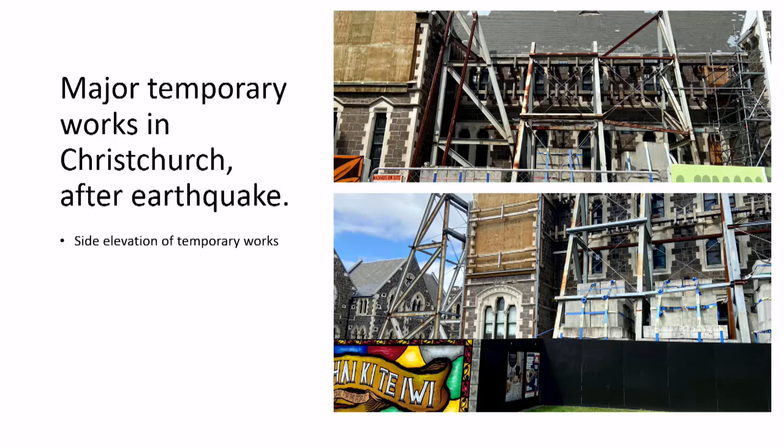That was them. We're in Christchurch now, actually, and that was the rebuild of the new library in Christchurch, which is quite good. The downside was it was actually an Anglican church in Christchurch. This was the 2011 earthquake, and this is the order of structural steelwork that was necessary to stabilise this building.

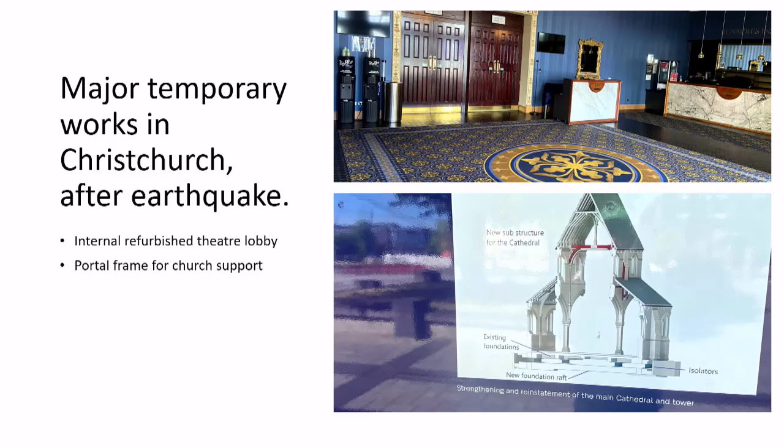But they got this thought process about the... They're actually stabilising a portal like that to support the rest of the building. But the money it was costing was so much that the government were saying, sorry, you're going to have to make this building more accessible to other people, not just your particular church religion, as it were. So there's a bit of a fight going on there.

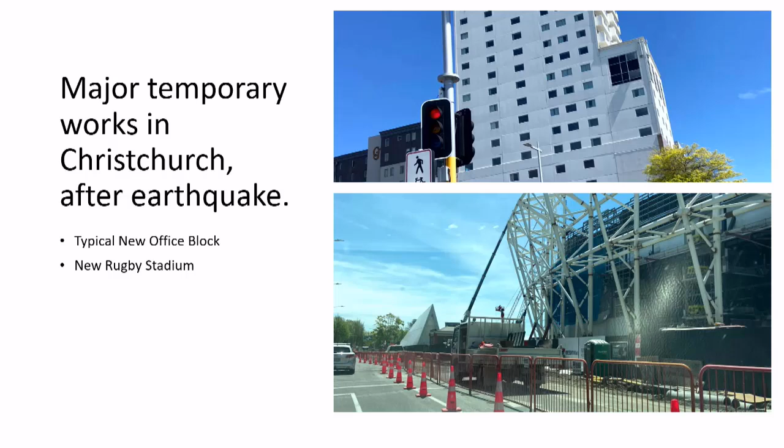I was determined to get a rugby pitch going here. This was the new stadium in Christchurch that's being built there. And that seemed to be a lovely bowl of an arena that's going up there.

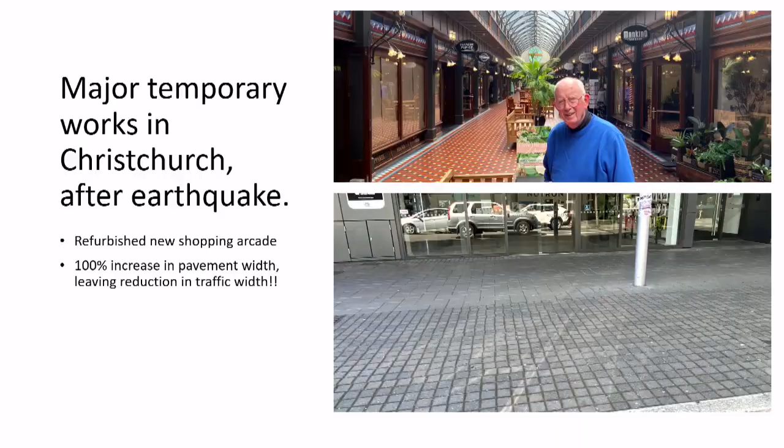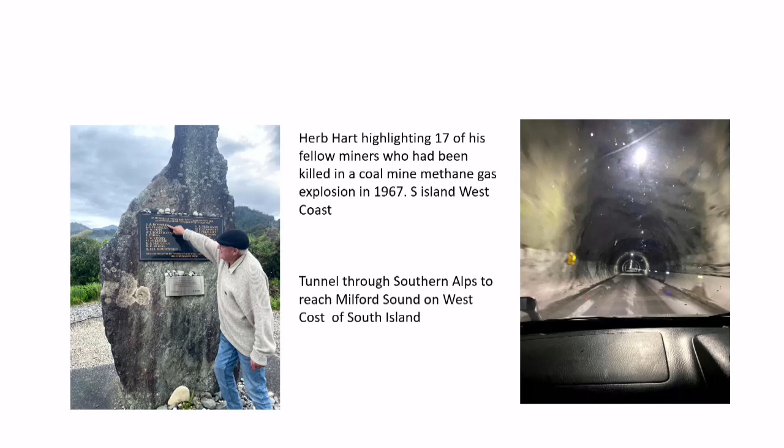Herb is pointing out here a chart that was showing, sadly, those that got killed in this mine disaster in 1967, and he had to identify, unfortunately, the bodies, and it was really quite sad. But nobody greater than Herb to see and realise the way that can get helped out.

I'm not of the right age to be climbing up glaciers from sea level, so I thought I'd get the chopper up. Got the chopper up, with three other guys in there, and I said to the lady pilot, this cloud seems to be building up quite a bit here. Shouldn't we perhaps be thinking about getting back down to sea level again? And she very quickly realised that was a serious thing, so we whistled into the cab and got down, and she was able to take the chopper down in the valley and not risk getting stuck up there for the evening, as it were.

Okay, we'll move on to our main presentation this evening, and it's about tunnelling through the Alps. So we have 3 speakers. Emmanuel Humbert, who's the Director of Construction, France Direction with TELT. Emmanuel holds a master's degree in civil engineering from the French National School for State Civil Works. He worked in the tunnelling industry for more than 2 decades.

After working for nearly 15 years in the Centre for Tunnel Studies, the French government's technical centre for road tunnels, he joined TELT, owner of the Lyon Turin tunnel, as head of the construction department, where he coordinates work on French construction sites. His experience includes road and rail tunnel construction and has been accumulated over the course of many tunnelling projects as a project engineer or project manager.

He has developed extensive professional skills in tunnel design, geotechnical engineering, and project risk and contract management. He's also a lecturer for postgraduate courses at French universities on the subject of tunnelling and tunnel boring machines. Emmanuel is involved in the ITA and is active in the French Tunnelling Association.

Second speaker is Adrian Fontana. He's head of construction management with the Pini Group. Adrian has been significantly involved in the construction of the longest tunnels in the world for the past 20 years: the Lötschberg Base Tunnel, the Gotthard Base Tunnel, the Ceneri Base Tunnel, and the Brenner Base Tunnel. His experience covers all phases of design, and he held all relevant functions up to the project manager at the Ceneri Base Tunnel and the Euralpin Lyon Turin Tunnel as a consultant to the client.

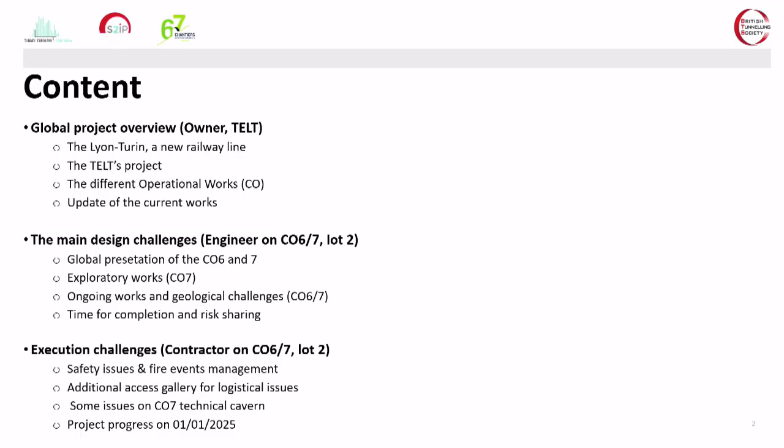Thank you very much. Thank you for giving us the opportunity to present this challenging project. I think it's one of the most challenging projects in France for sure, in Europe also, and perhaps also in the world. As it was said, this presentation is split into 3 parts. One overview of the project, I will present it. I'm the owner of the project. One focus on the designer's point of view with Adrien, and also the company point of view with Benjamin Leconte from the company. First of all, the project overview.

This project is led by TELT. Maybe you don't know who TELT is. TELT stands for Tunnel Euralpin Lyon Turin, the public promoter of the project. I work for TELT, for which I am the construction manager, and I personally am in charge of organizing and following all the works on the French side.

TELT was created in 2015 by the French and Italian states and is responsible for the design, construction, and operation of the cross-border section of the future Lyon Turin link. So what is the Lyon Turin link? You'll see a little bit later.

This society follows a previous company, LTF, that was in charge of the studies, investigation, and preliminary works. And also, a little bit earlier in 1994, Alpetunnel, which was in charge of the very beginning of the studies.

Above all, the Lyon Turin link is not just a project between Lyon and Turin. It's only a part of a wider project across all of Europe. The idea is to create an efficient global network through Europe, and the Lyon Turin link is one of the parts of this project.

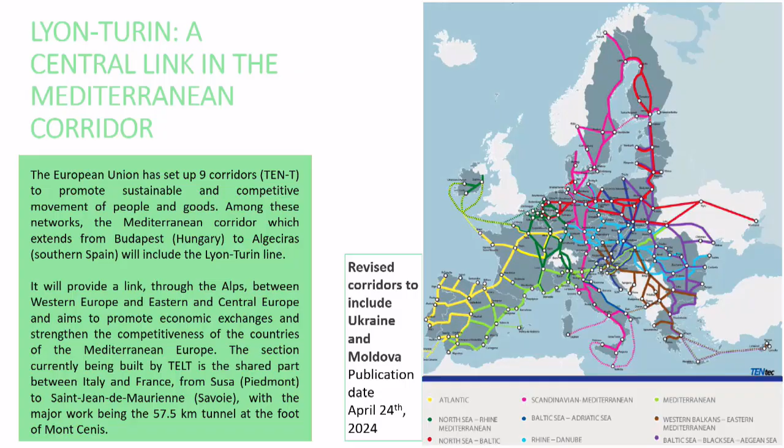This project is composed of nine corridors, and Lyon Turin is in the center of the Mediterranean corridor. So why is Lyon Turin such a challenging project? Because it has to cross the Alps.

The global line between Lyon and Turin is 270 kilometers long and is split into three parts: one French part, conducted by the French railway company; one Italian part, led by the Italian railway company; and the cross-border international section, where TELT, my company, is in charge of organizing the construction.

The principal challenge of this project is to pass through the Alps. A historic line already exists, but is fully inadequate because of its characteristics and geometry. The idea of this project, like other similar projects in Europe, is to pass through the Alps at their base, creating an efficient infrastructure that boosts the communication of freight, passengers, and people all through Europe.

Other similar projects exist: there are 7 long and deep tunnels under the Alps. The design of the Mont-Cenis base tunnel is based on the experience of the others, some under construction and some already built. The 7 tunnels are the Mont-Cenis base tunnel for the Lyon Turin project, the Gotthard base tunnel, the Ceneri base tunnel, the Lötschberg tunnel, for which Adrien also worked previously, the Brenner base tunnel, the Semmering base tunnel, and the Koralm.

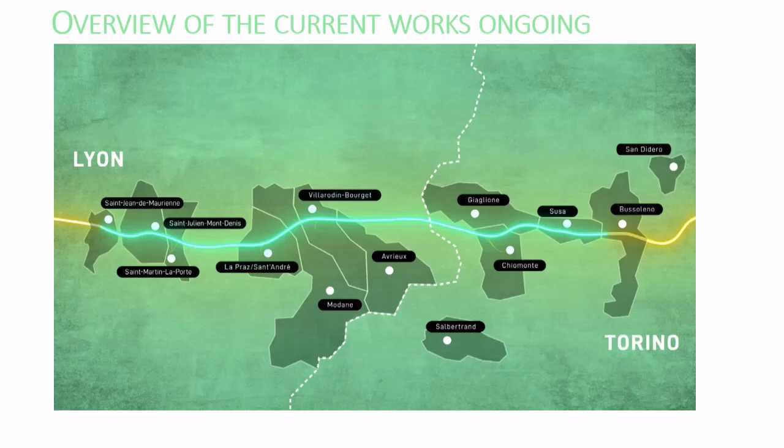So let's have a quick overview of the works. This video is not quite up to date, but has been made 6 months ago.

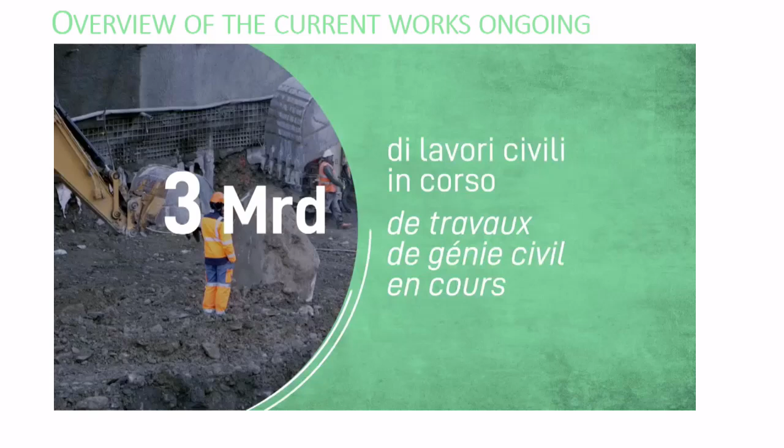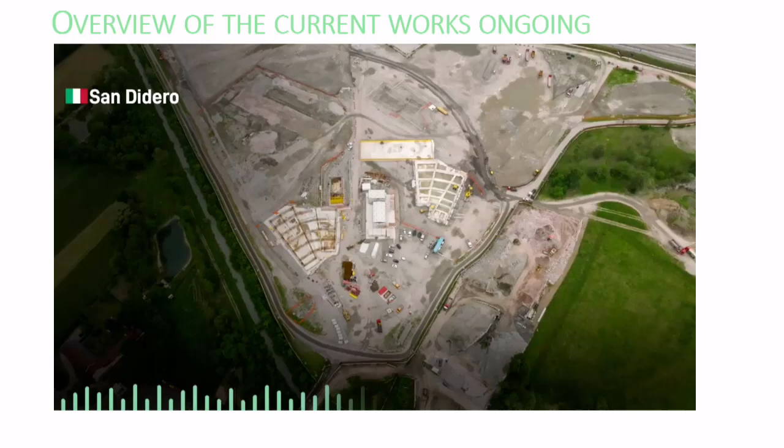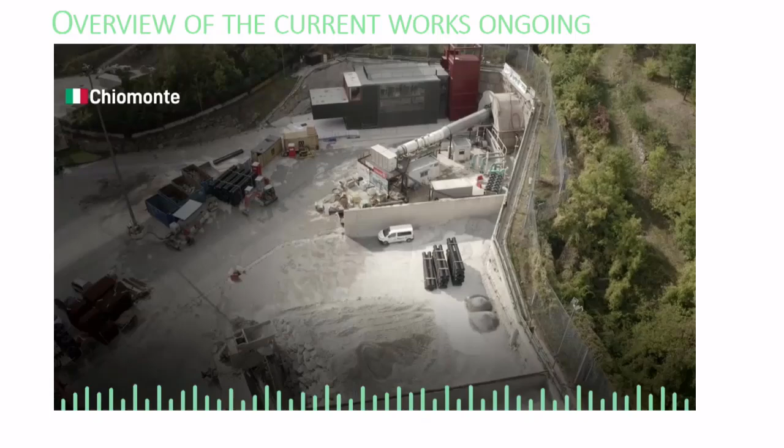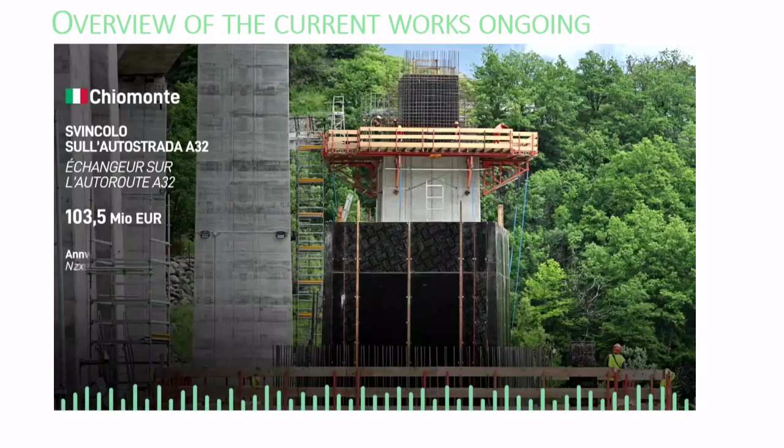Here in Italia, the entrance of the work in Italia, Piemonte, and all the preliminary works to make connection with the motorway, actually ongoing. The preparation of the sites for materials, Italia also.

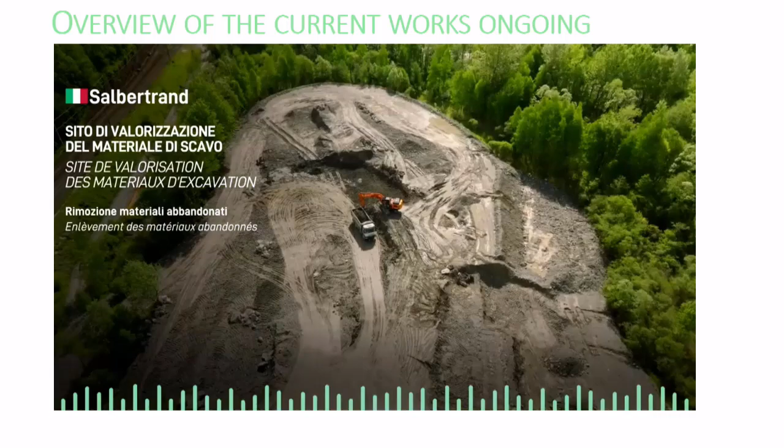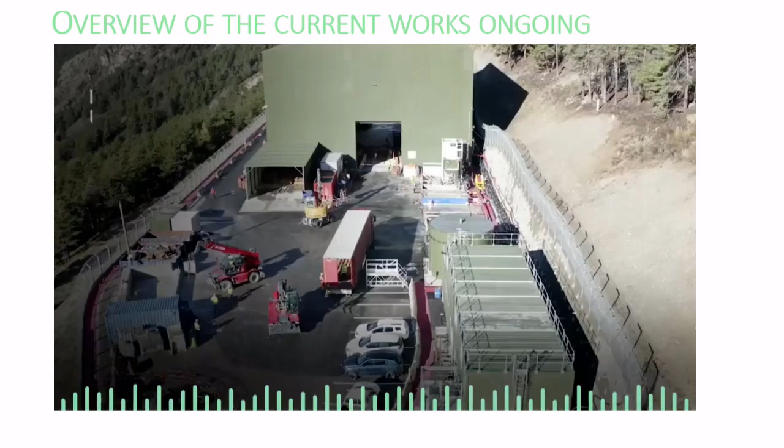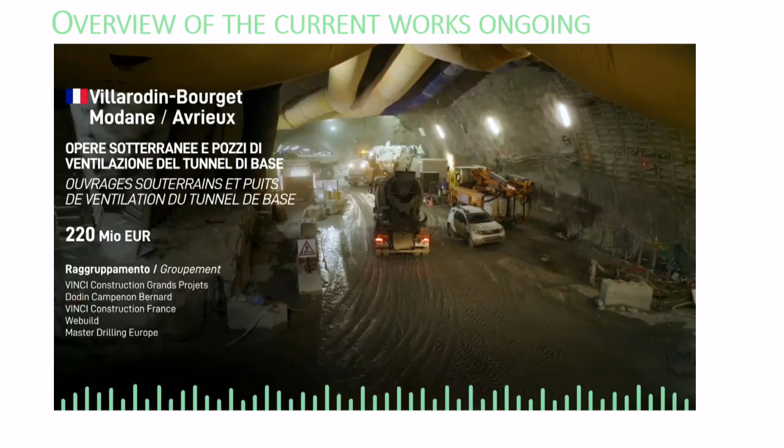Here in Modane, a road to avoid the trucks passing through the city, and also the preparatory works of the 4 shafts to bring ventilation for the next part of the project: Saint-Martin-la-Porte and La Praz, which will be presented a little bit later.

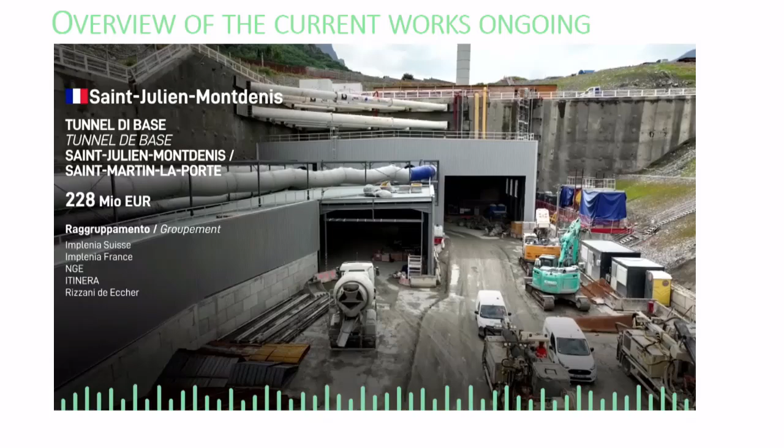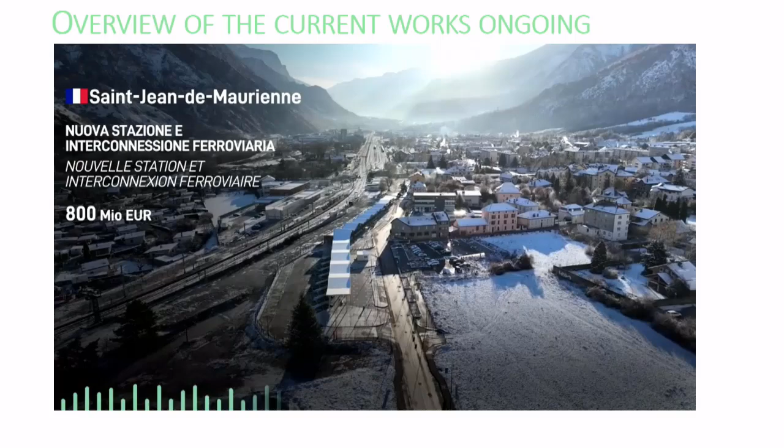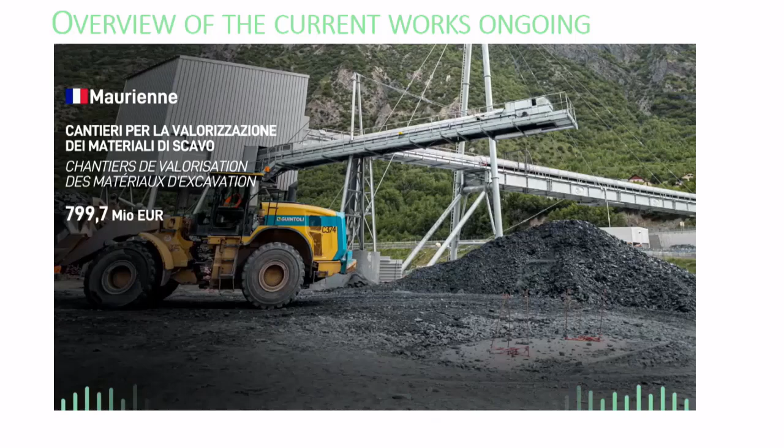Saint-Julien-Montdenis, the entrance of the tunnel in France. Saint-Jean-de-Maurienne, where lots of works are ongoing to connect with the existing railway network. And also one specificity of the project, the management of excavated material, which is specific to lots of construction.

Finally, to introduce the next presentation, I will talk a little bit about the contract. What is the spirit of our contract? The spirit is to divide, to have a sort of risk-sharing policy in our contracts.

The principle that will be developed in the next part of the presentation is that on the one hand, we have the logistical and construction method risk that is assumed by the company through the contracts. On the other hand, the owner keeps the risks defined for the geology through the risk register.

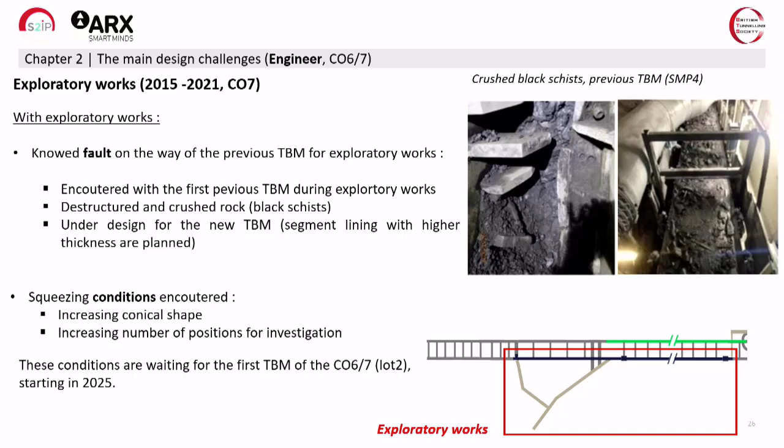The technique is getting further - the TBMs that we have today are not the same as 20 years ago. The technical issue helps us, and time helps us do some challenging projects and do it faster, and it's possible. Here you see another picture, this is the existing tunnel - there was a single shield that worked for 8 kilometers, and they encountered 2 faults with squeezing conditions. This actually was the basis and input for the design of the main tunnel.

The exploratory works - just to show you some pictures, for that squeezing we went up to 1 meter of squeezing. This is a condition that's really difficult - finding the support to manage these conditions is really difficult.

They tried different systems, and at the end the solution was found with flexible support using TH arcs, which were used in other big projects too. Here you see the pilot tunnel used to handle this first squeezing, and then you can stabilize and do the real galleries. This was the exploration, these pictures from the exploratory work.

Now we have 3 machines, 3 TBMs. This one is actually in the tunnel today. Diameter classic, 10.42 meters - it's a big feature, really nice, something special. We have a conicity so that we can manage squeezing rocks. We hope it works, we want to see that in 1 year.

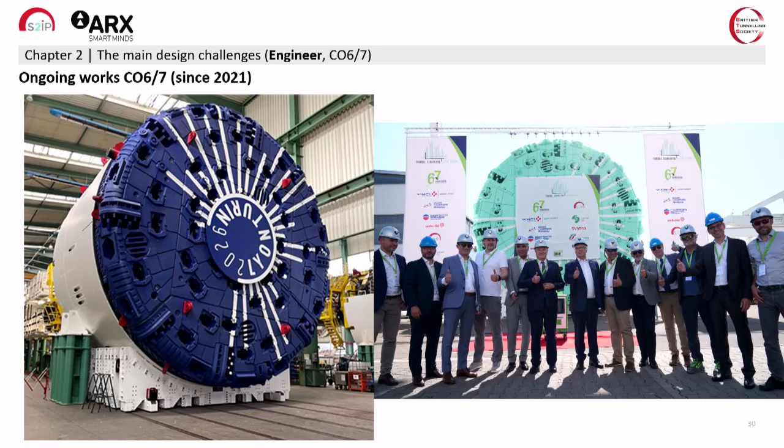Now, what else - that's actually the interesting part for me now: drill and blast. You have a lot of drill and blast.

For me, it's always special because you never know what you're going to have, and the safety part is a big issue too when you have drill and blast. This is one example on the right side. You see a big technical cavern that has sections of 380 square meters.

It's really big. And when you have the bad luck that the geology is not so good, because here we had some problems. You see, this is a ramp that we had to make to reinforce the 160 meter long cavern. We had to reinforce about 50 meters with 12 meter long steel anchors. Maybe Emmanuel is going to talk a little bit in detail about that. But okay, we know that we have some problems.

We have 2 kilometers of squeezing. Its name is Ouillet. It's an important squeezing condition that we expected. As I said before, up to 1 meter of squeezing, and it's going to be pretty challenging. We're going to start in there in a few weeks. We will see. Maybe next year I can talk more about that.

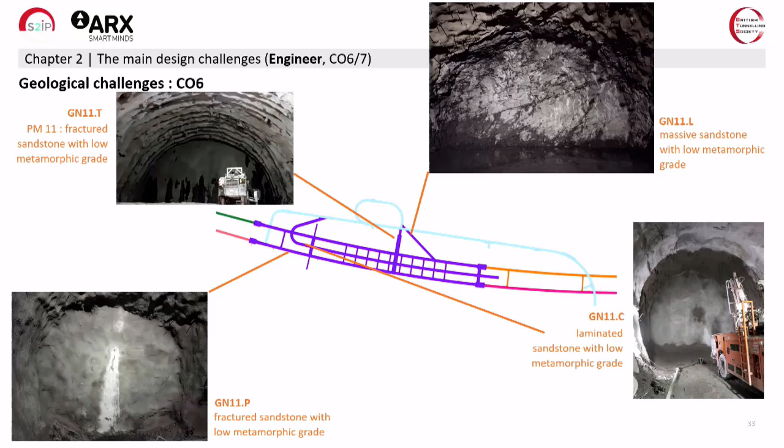And here the thing that we really have to watch out for is the influence from one excavation to the other. When you're in there, you have excavated the central one, and you're going on the left side, and then it's going to start moving on the other one. And this is always tricky. This is the other one, some pictures.

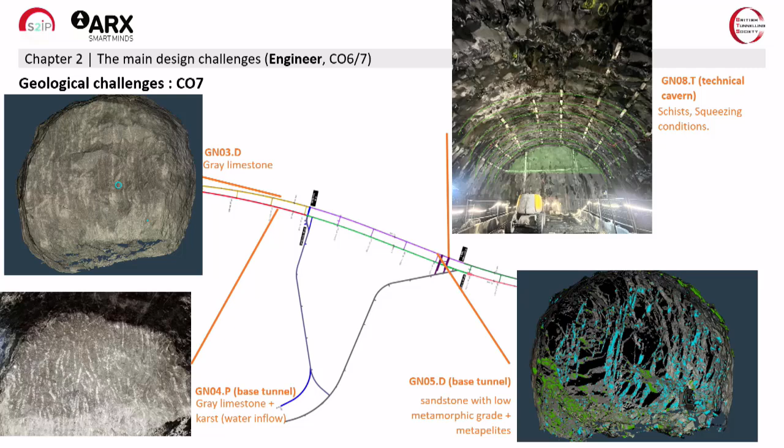Here we see this technical cavern where we have to reinforce. This is ongoing. You see we have some scans. The geology is managed with 3D scans to have better information, and we try to use AI too, so that we can be more precise for certain interpretations. Let's say it like that.

Okay, this nice picture. This is direction France. This is the limestone with karst. And you see, when you have a preliminary exploration, we have a core drill or a destructive drill. But when the drill is over here, this one you don't see. This is a karst. This is not an excavation.

This was the face. This was a 3-meter drill and blast advancement, and there was a karst filled with clay. Here it's no problem, but when you have this on this side and it's filled with water, it can be a problem.

Okay, this is the whole zone that we have now going in the French direction. It's really interesting for the geologist, but it's pretty tricky, and we have some water too. Here the karst was empty, just clay, but we have some zones where we have water, where we're going to drain the water. Okay, now quickly to what Emmanuel said before.

This is actually really important. It works. It's based on this norm in Northern Europe actually. It's this risk sharing. It's really to try. We are constructing a prototype, so we need an instrument for how we can work and how we can pay the contractor, how we can be sure that it's not going into big claims and big problems at the end.

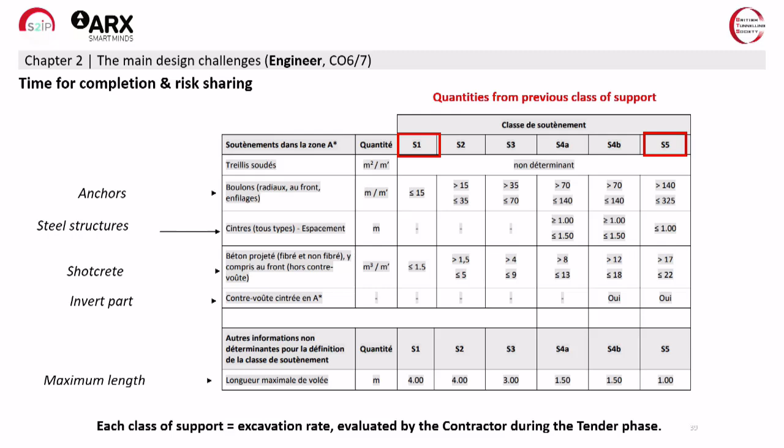And when you're in the range, when you have your shotcrete and you made more, like instead of 10 you have 20 centimeters of concrete, you're going to the next class. And it's paid. You know every day what your contract costs.

Okay, and when this doesn't work, because the prototype, I repeat, is always a prototype, when these classes didn't work, when the designer didn't see everything and didn't think about everything, we have another instrument. That means that we can enter these exceptional conditions. It means that our whole toolbox is empty. We have to invent or calculate or find something else to get through.

Then we have this instrument so we can go to this exceptional condition. It means we are mobilizing engineers, experts, and the contractor to find how we can go through. And in this time, day by day, the costs are paid. Because when you have a team of 10 people waiting 8 hours, you have to pay.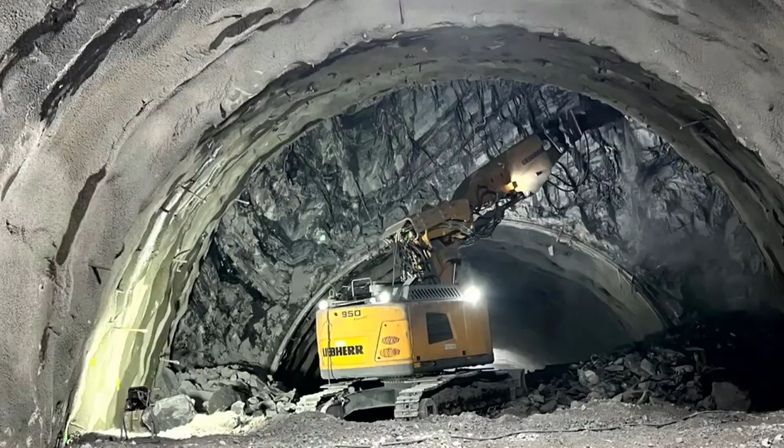Cross-section, always a problem, because it's really difficult to calculate, really difficult to know what is coming and how the stress is going into the mountain. Here you see one face on the right, one on the left. You have to work on both sides, because you can't work just one side, or you're going to have a lot of stress problems in this cross-section, especially when you have these wide sections.

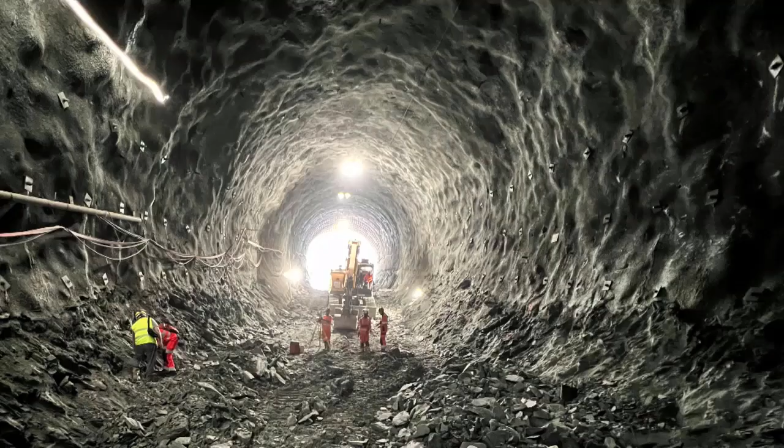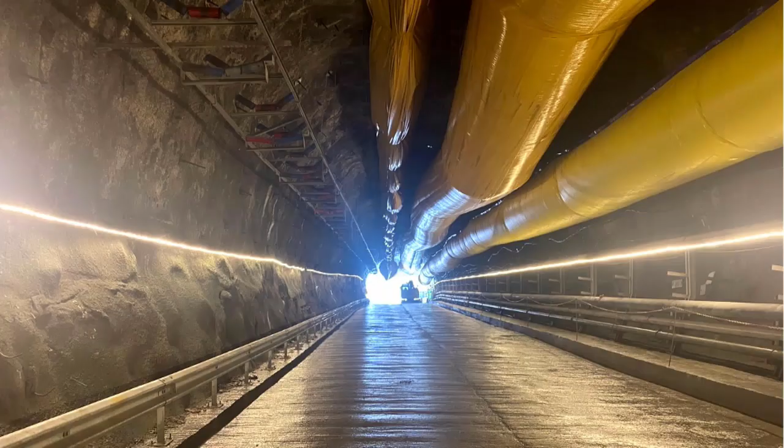When we started the project, one of our tasks was that we had to expand one adit because it was actually too small. Here you see we had to work with drill and blast. We went down with the invert for 1 meter 60, and you see the result. You see this one at the end was like that. It's actually pretty nice, no?

And now it's clean, and we have a ventilation issue, because it's always difficult to put all the air in this system. We had some problems, but we're going to resolve it at least. And here are some pictures, just to show that we are really on the construction site. No, it's not just for the show.

Thanks, Adrian. I will not reintroduce our joint venture, so I will directly move to some safety issues. I will discuss first fire events, because I understand that in the UK you don't have the same approach regarding fire events. So in the past, TELT signed an agreement between the fire brigade of the valley and the project.

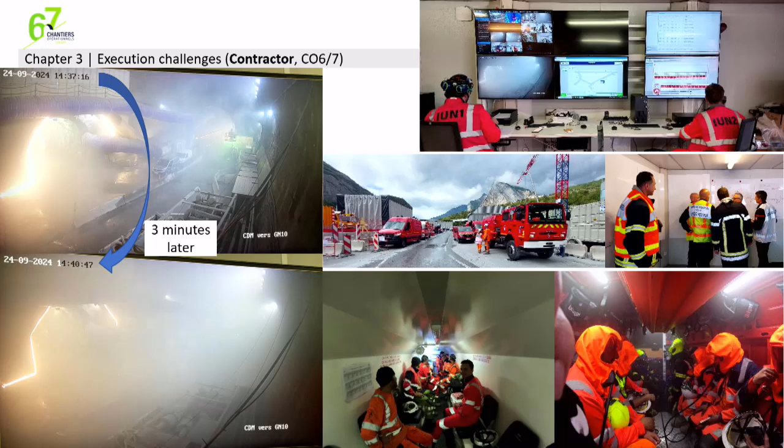Just some pictures of this event. We brought this cold smoke into a cross passage. You can see that 3 minutes later we could see nothing. And on this side you can see all the firemen working to test the ventilation strategy, and all the guys who were in the rescue chamber.

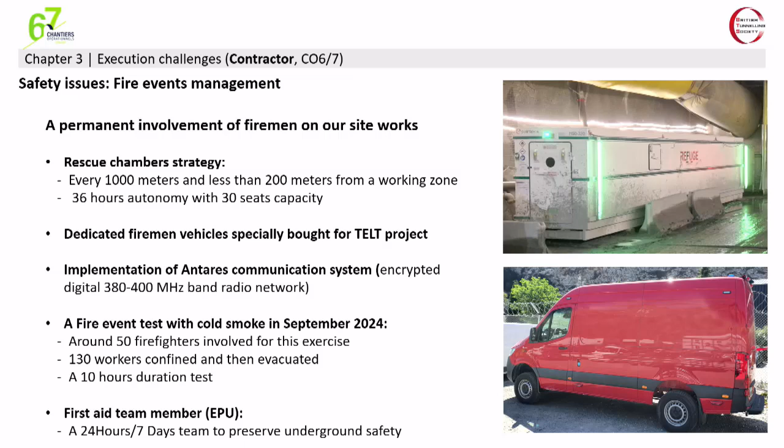And this was a very fruitful exercise, I would say. Maybe just in addition to that, one specification on our project: we implemented a first aid team. It's a team dedicated to safety. They ensure that, for example, rescue chambers are fully operational, there is air, food, and so on. All the devices and communication systems are working properly, and they are working 24 hours a day, 7 days a week, just to ensure everything is okay.

Without any transition, I will just jump to other stuff now, more dedicated to logistics. So we are on CO7, on the west part of the project, and when we arrived, there was an existing adit, the west adit, and from this unique adit on 500 meters, we had basically half of the project to excavate and to manage. This adit on these 500 meters is basically an 80 square meter adit, and within this adit we need to ensure all the muck out of the project, because for different reasons we do not muck from the other site. So all the muck is going through this adit.

That means we need 3 conveyor belts. So basically we have around 4 million cubic meters to remove. Because here we have a TBM, we need to bring all the segments, which go through this adit. We also need to supply basically around 800,000 cubic meters of concrete for the whole site. We need also fresh air because we are in tunneling. We have also exhaust air because of drill and blast works.

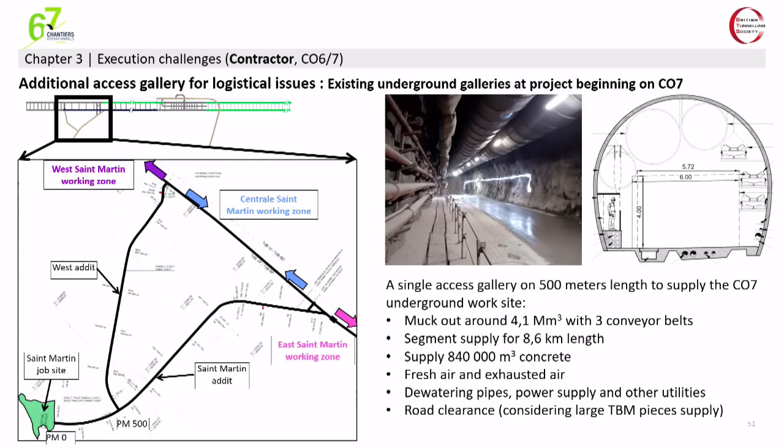It was a real challenge, and when we went into the detailed design, basically we said, okay, look, we need a little bit more fresh air, we need more exhaust air, we need more space for the conveyor, we need more space for the circulation area, we need utilities and so on, and it was a real nightmare because it was not feasible to bring everything inside these first 500 meters.

In addition to that, this is a typical section, so it might seem quite okay, but at the end of the day, you need to keep in mind that at some intersections it's a little bit more challenging. So at this intersection, at PM so-called 500, we need to perform additional huge excavation just to ensure that the conveyor belt is crossing and so on. Huge challenge. And at the end, we said, look, we need another solution because we will never succeed to work properly with such a solution.

So the solution was, okay, this is the first 500 meters. Let's do an additional adit of basically around 500 meters. And the idea is with this adit, we will supply all the west part of the project, while with the east adit, we will supply the east part of the project. So we made the design, we arrived with a 70 square meter section. We solved some ventilation issues, some clearance for the vehicles.

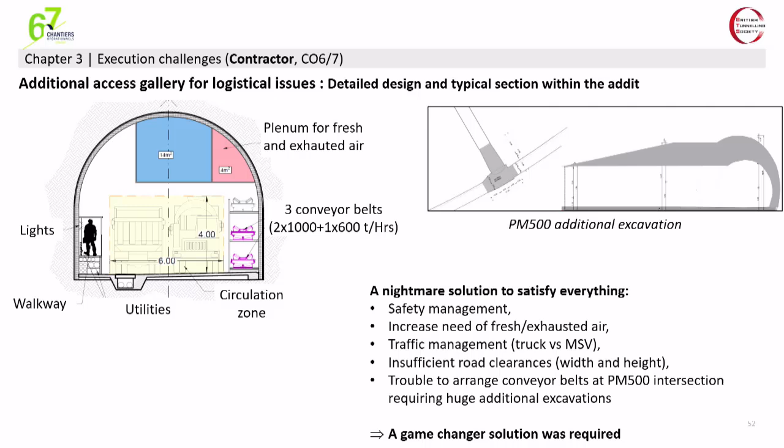We also changed the strategy for the ventilation. In fact, now we can make a circle for the ventilation. That means we bring fresh air here, within the tunnel section we go here, and then we go back. The fresh air is doing a loop, and then we can pick fresh air, for example, for this tunnel and everywhere. And that's definitely a game changer, because for us, at the beginning, within this part, with this 14 square meters, we needed basically 25 meters per second of air, and it was a nightmare. It was a huge power consumption. So with such a strategy, it was feasible.

So we made the feasibility in spring 22. Then we made some ground investigation, especially close to the portal during the summer, detailed design during the autumn and then to the spring. We also needed client approval.

We got it in December, and then we began the excavation just after, in December 22. And we finished the excavation some months later. So during this period, we also made some other excavation. That's why for only 600 meters, we needed such a duration. But basically, we made other stuff.

So this is the beginning of the project within the mountain, and at the surface, close to the portal, we went with umbrella vault. And here you can see the project once it was finished. So here you can see the 3 pipes. It's for exhausted air. So within this project, everything is beautiful, except that we still have a conveyor belt here.

And when we made the detailed design, we were expecting the tension unit could be made at the ground surface, but at the end of the day, it's a little bit too long. And on some meters, we have a narrow section for vehicles. Everything is in the detail.

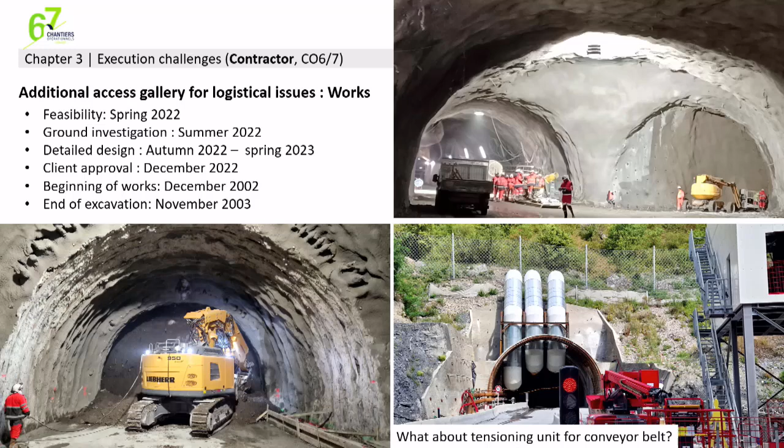Okay, so this tunnel has a cost of basically around 9 million euros, and the question was, who is going to pay? We asked Emmanuel, do you want to pay? The answer was no. Then the question was, do we want to pay ourselves? The answer was also no. So the idea was to find a solution with some optimization elsewhere within the project.

And we saw a solution with TBM assembly and logistics on the East Saint-Martin working zone. In other words, this is the East adit, and as per the basic design, we were supposed to do a gallery here, then with conventional excavation, this gallery, then a huge cavern, then we can assemble the TBM. We are supposed to assemble the backup within this area, and then we excavate.

After discussion internally and also with our engineer, we found an alternative solution, consisting in saying, look, let's assemble the TBM within another cavern we have to build for different other reasons. We will rotate the shield and the backup on a sufficient length, and as a consequence, we will save some money. So, from a cost perspective, because we were removing a cavern, which was a temporary cavern, we were saving money. We were also saving this logistic gallery.

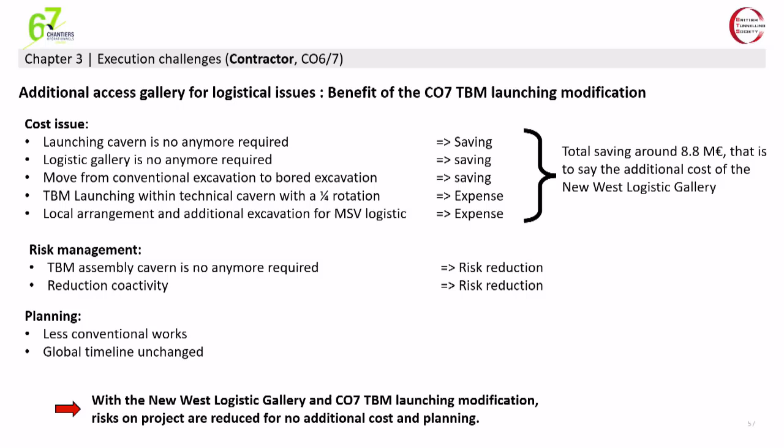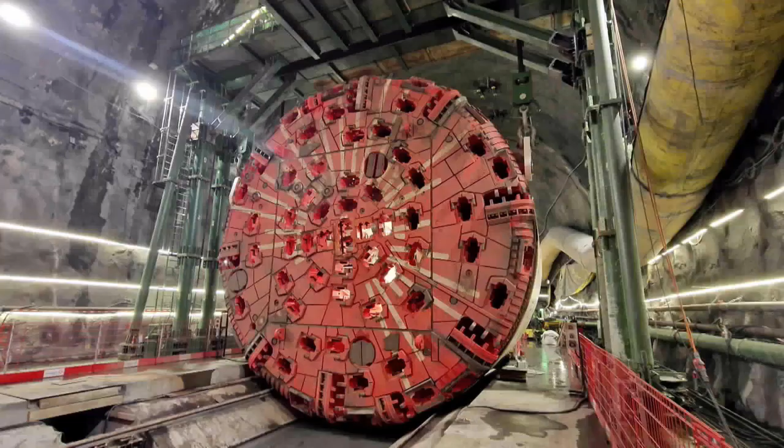So basically, this is the configuration we were in in November, and I would say everything was okay. And here you can see the shield TBM assembly, just in November when we put the cutter head at the final location. But we got some issue with the technical cavern some weeks later. So just a few words about this technical cavern.

So basically, it's 25 meters by 20 meters. We are 700 meters below the ground level, and as introduced by Adrian a few minutes before, we are in black schist with some sandstone and pelite. Ground condition basically around 60 MPa, and we know that we will have poor ground condition with GSI around up to 35. Support: bolts with basically around 1 bolt per square meter, lattice girder, shotcrete, and also fuse layer.

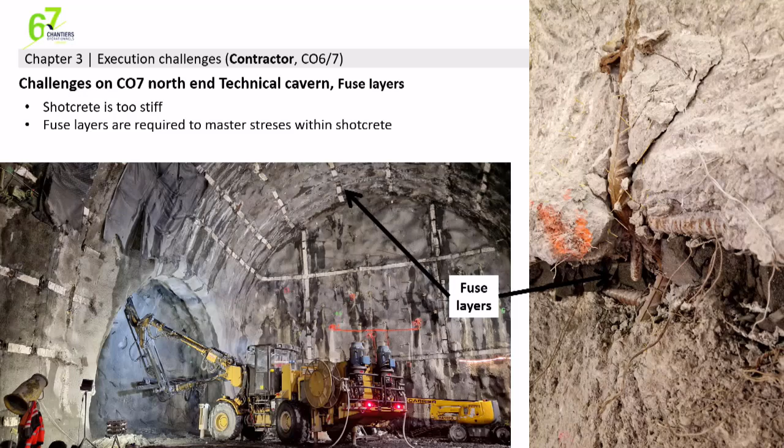While we were excavating, we completed the excavation of top heading and stross, and while we were still excavating in this area, we could see that it was difficult to manage the convergence.

End of November, we were around 35 centimeters of subsidence at the vault, and there was no trend to stabilization. There was more, I would say a trend of acceleration, because at that time we were between 5 millimeters per week of drawdown, and it was increasing a little bit, and we went up to 10 millimeters a day.

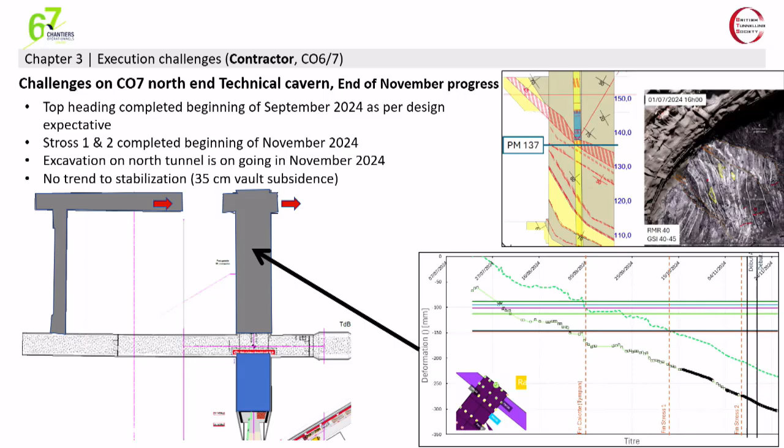So beginning of December, we decided to backfill the cavern around 6 to 8 meters, and to implement additional new bolts, 12 meters.

And that's true, because we switched from 10 millimeters a day up to now, today we are around 1 millimeter per week, a little bit less than 1 millimeter per week.

In December, we excavated 100 meters, so you could say it's not so much, but you have to keep in mind here we are in top heading, and we have a large section with top heading. Also, we are in schist and sandstone, so we are bolting 8 meter, 12 meter, shotcrete, lattice girder, so it's quite difficult condition.

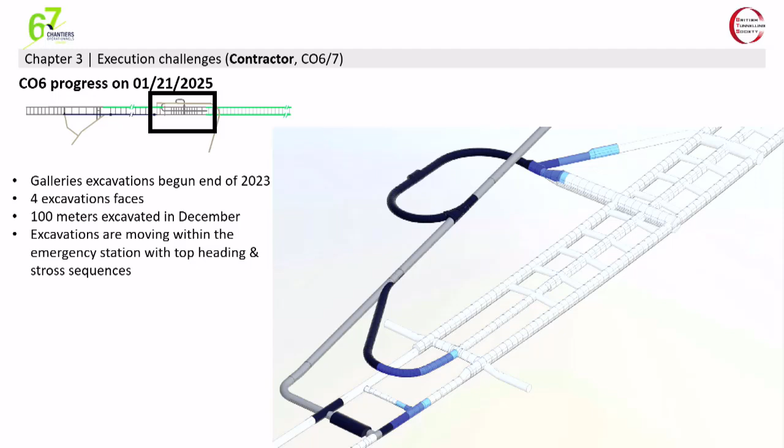On the west side, here we have two different configurations on CO7. So on the west side here, we are working in quite good conditions because we are in limestone, so everything is beautiful. Mid of December, we made 32 meters in the week on one face.

So it was a good beginning. Again, we still need to go faster, but it's a good input. But we know that we have to fear water inflow on karst.

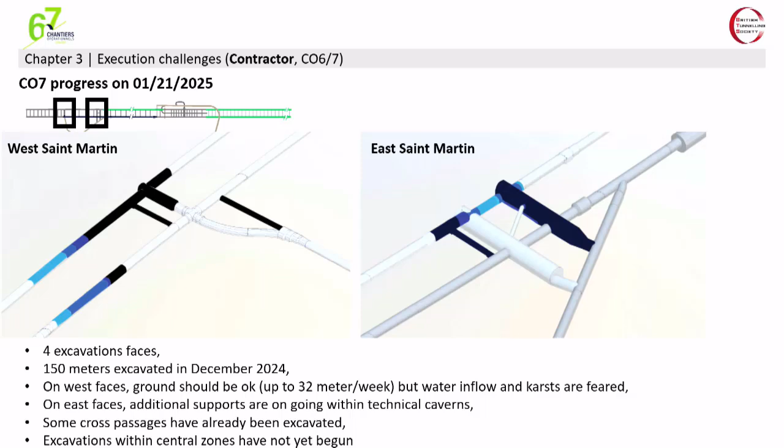On the east side, in December, we essentially made some reinforcement. Also, we have already done some cross passages here from the existing tunnel, and we have not yet begun the excavation in the central zone on the so-called houiller, but it will come in the coming months.

Just some words about conclusion. So logistics is key, especially for such projects. Logistics, underground logistics, but also on surface.

As you could see on the picture from Adrian, on surface we do not have so much space. In fact, in Lapra, on CO6, we have only 20,000 square meters, while on CO7 we have 40,000 square meters. For such a project, it's definitely not enough, but at the end of the day, we are within a small valley. It's difficult to find some space.

We have two conveyor belts which are coming from the east side, one from the west side, and then we have two conveyor belts. So it's a huge tower. We need to succeed to fit within the available space. We need to keep some headroom, so it's a challenge, and definitely logistics is a challenge.

Keeping in mind, we also need to arrange with ventilation issues. For such a project, we need experienced workforce. Basically, today on the project, we are 1,300, and within these 1,300, we are basically 400 on the top management side, and the others are workers working on site.

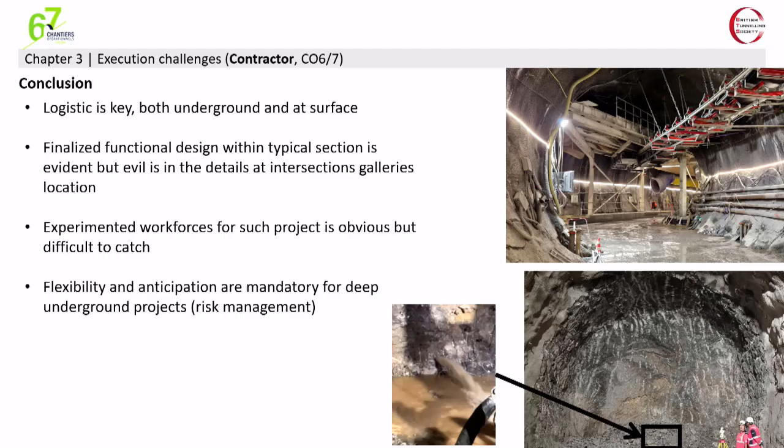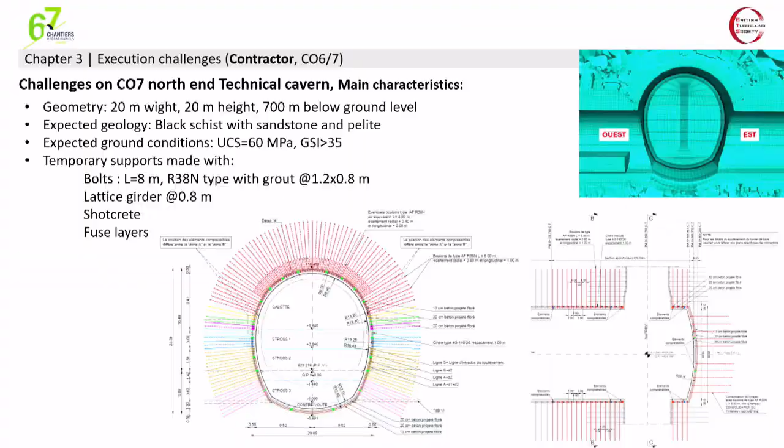You're asking how do we assemble the TBM within the cavern, that's right? And how do you get all the materials down to the adit, through the adit?

So we brought the different pieces of the TBM through the adit. Within this adit we have a clearance of about 7 meters width by 4.5 meters height, and we designed the TBM pieces to go down for such headroom. There wasn't so much available space, but it was okay. Then we preliminary assemble this device, and as you can see on this sketch, we bring all the small pieces and assemble them within this cavern, which is 20 meters by 20 meters, and we have such an arrangement. I don't know if I'm answering your question.

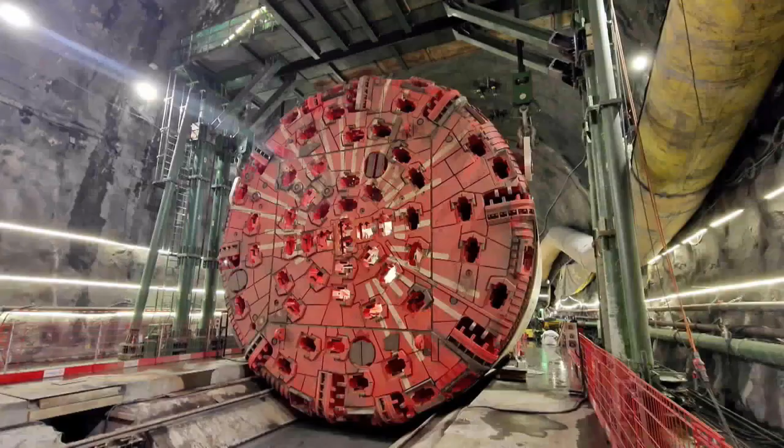Just the other thing about segments, how are you going to get the segments down? So later we will bring the segments with an MSV going through this adit. In fact, here we have an enlarged cross passage, and the MSV will go through here, up to there, and up to the tunnel we are going to excavate.

Regarding lining, we have a 50 centimeter thick segment, with an arrangement of 8+0, and the ring length is 2.2 meters. So it's quite a long ring. The idea was to get as long a ring as possible for logistic reasons, because we know especially on the other side the logistics of the segments will be difficult. During the tender we were more with a 1.8 meter segment ring length, and we decided to increase to 2.2 meters just for logistic issues. Thank you.

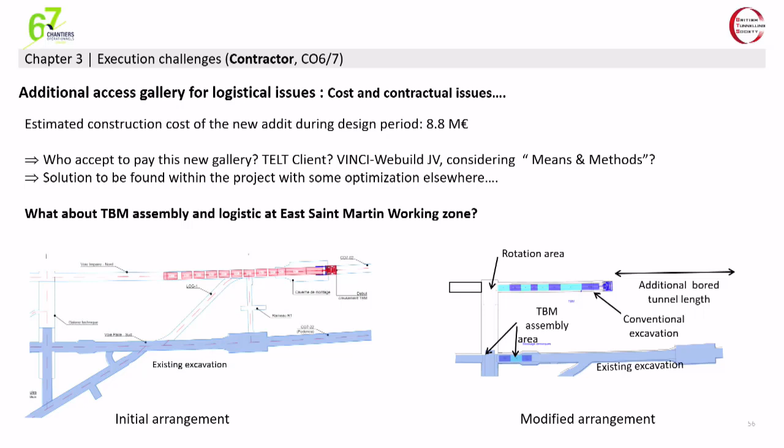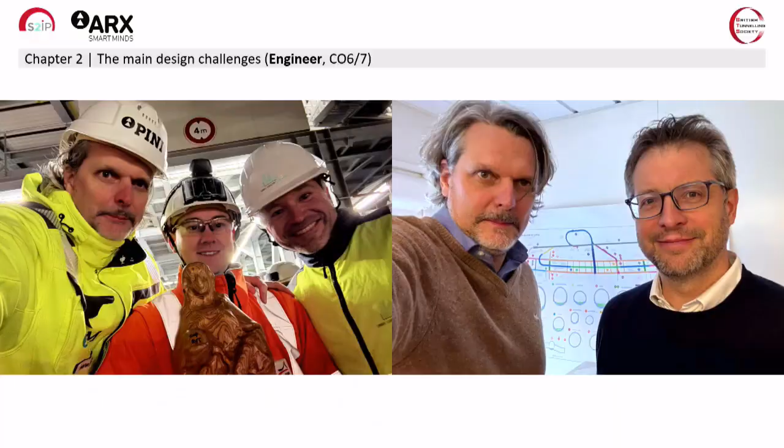Steve Parker, Keystone Tunnelling, two questions. On the squeezing ground, what allowance do you make over the years? Obviously you've got a kinematic envelope for the trains that you must achieve for the trains to travel through, yet you're talking about some big movements over weeks and days and months. So when you're doing your design calculations, are you ending up with a tunnel that is 2 meters bigger around the kinematic envelope that you require, or 1 meter, or will you say, if it squeezes in and comes in, we will go back 5 years later and make it bigger? How do you calculate that? And then in the tunnel area where you're using the segments, how thick are they, because presumably they are also designed to stop the squeezing ground?

So first, there is now a huge background because from this adit excavation, here is a picture from the adit. This adit was excavated 20 years ago, and now we have some knowledge of the adit because many people worked on the constitutive model of how it's going, and they could demonstrate that there is some viscous law. With this viscous law, we can anticipate what will be the movement of the ground. So basically the idea is...

This squeezing ground is at the end quite heterogeneous. Sometimes we have 1 meter like this, and locally, some meters away, you can have only 50 centimeters. But the idea basically is you excavate, you put a lot of bolts, definitely 8 to 12 meter long bolts at the face also. When we are in very poor ground conditions, we do this pilot tunnel. And with this bolt, sometimes you need to rebolt later because the bolts are crushed.

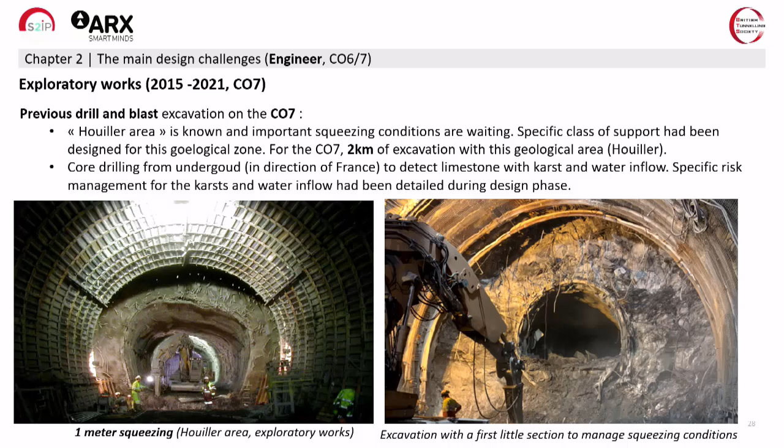There was preliminary work between 2015 and 2021, where there was a gallery called SMP4. SMP4 was an exploratory gallery at real site conditions. In this phase of the project, we experimented with lots of techniques, also with universities in France and in Italy. All these results are taken and recalculated, reassembled, etc., to make the detailed design for this part of the project. Also, I have to keep in mind that the parts made for TBM were not concerned by these challenges, which were only on specific parts of the project made with the drill and blast method. So the segments are not really concerned by this problem. So yes, the answer is yes, we made lots of experience and tests on various materials and techniques to find the best solution to pass through these conditions.

Eric Kukai, design manager for Skanska on HS2. I have a question from a contractual perspective. I'm not sure whether you mentioned what suite of contracts you've adopted for the project, because on HS2 we've adopted NEC3, and government and HS2 are under a lot of pressure, with the contract questioned as one of the reasons the project has been over budget. So what are you adopting? You mentioned that the client will take the geological risk and the contractor the execution risk. Can you expand and elaborate on the contract you used and how the payment mechanism works?

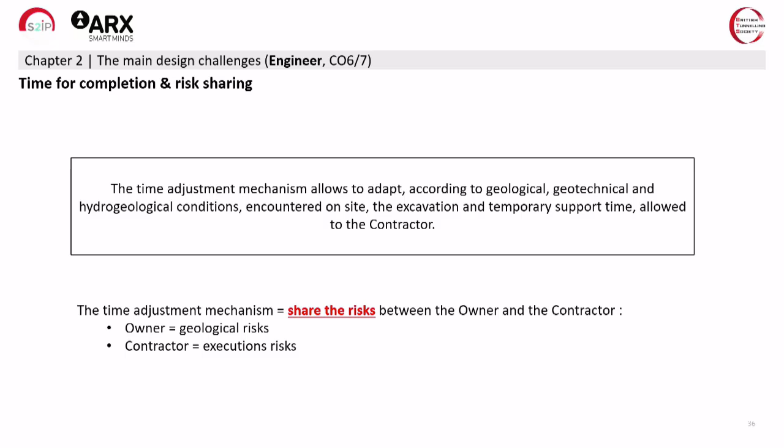So this is from Leon Hedwig. What drove the choice to select single shield TBMs? Good question. Long answer, maybe. First you then. No. So maybe first, here there was an existing drive made by a previous contract. So when we are doing the other drive, we don't have so much geological risk. Then we know where we are going, and for this location, segments were considered the best option. After, do we go with double shield or single shield?

We went with single shield because in France, first, double shield is not so used. And the idea was also to get a compact TBM with a shield length quite minimum. In fact, we have 10 meters only. So the idea was to get something quite small with a huge conicity. And with that, we said, okay, there is not so much risk. We can go with the single shield solution.

For that location, during the bid, it was open. In other words, we could either go with a gripper machine or a shield machine. From the contractor perspective, we finally decided to go with a single shield machine because, after analysis of the existing, but not so many boreholes in the area, we came to the conclusion that ground should not be so much different on this part than on this part. So finally, we decided to go with single shield machine.

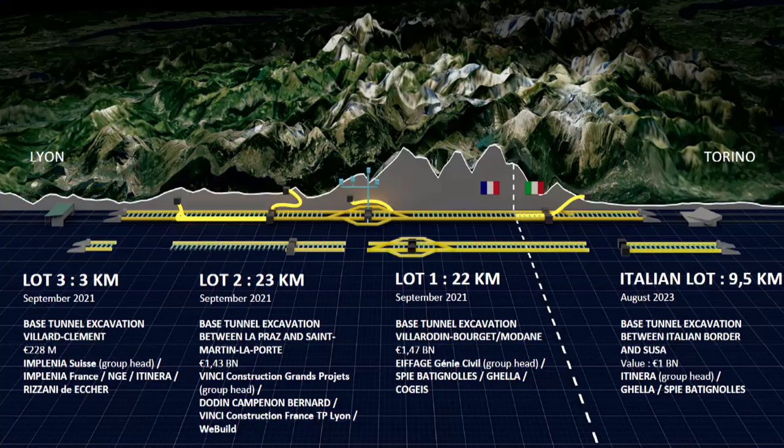So today, yes, we are confident that we will complete some of the sections. I hope almost all the sections. For sure, it will be difficult for those sections, taking into consideration lots of difficulties from a geotechnical point of view, but in the future we can be also confident. So which goes back to the question of risk. Yeah. My question comes back to it. If you can't commit to the date, there will be extra risk, which means that in terms of the geological risk, the values that you presented for those sections are to a certain extent accepted.

So will the project overrun, and who will bear the cost of the overrun? Yes, we will support this cost, obviously, because I said the geological risk is on the side of the owner. So if there is some extra cost or some extra time due to the geological part, the owner supports this cost. Of course, it will have an impact on the operation, on the opening of this section, but you are aware of this risk today. And it's a part of the project, it's a part of the contingency, etc. And we consider all these aspects today, yes.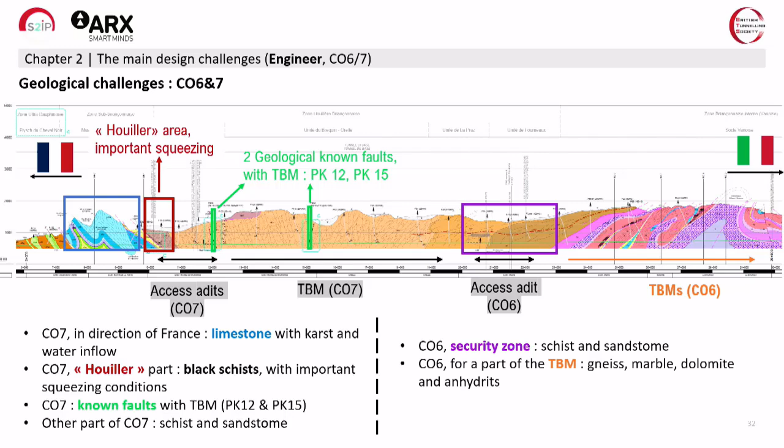The main engines, the main vehicles work with electric when they work on a workstation, but when they move, it's diesel. We do not have any battery, and the idea is not to work with modern batteries with lithium and so on, because we know that in case of fire it will be difficult. I don't know if that's answering your question. It's still an issue, you know. Maybe the question was whether we have electric vehicles, or vehicles that transport a segment.

I hadn't really thought about it from the lithium-ion perspective. I was more thinking about it from having flammable materials on site, like diesel and petrol, that could cause a fire risk. But obviously, being in a tunnel, you've got the ability to hardwire your electricity supply anyway, so you wouldn't necessarily need battery power.

Well, every vehicle is a fire risk, actually. All vehicles have self-extinction systems, but you can never be sure that you won't have a problem. TBMs normally are not a problem. The vehicles, not. The problems that we have in tunnels are the small vehicles, the transportation vehicles for personnel, when they have an incident. But it's not more than other projects.

And just one last bit. Obviously, most of that tunnel is within France. Is the cost of the tunnel more evenly split, or is France having to pay a higher burden because most of the tunnel is within their territory?

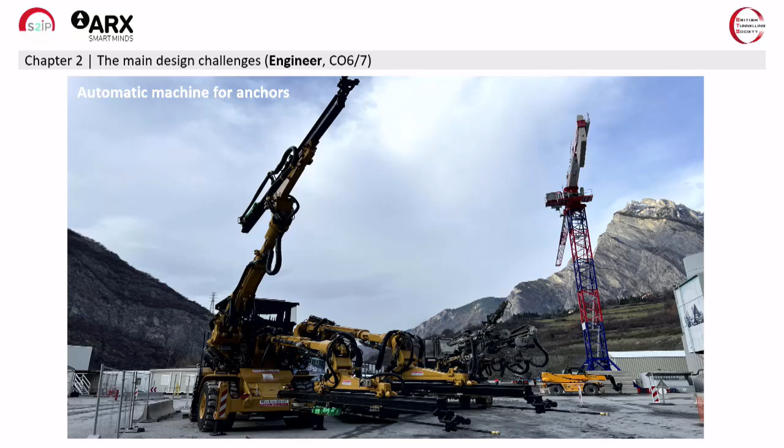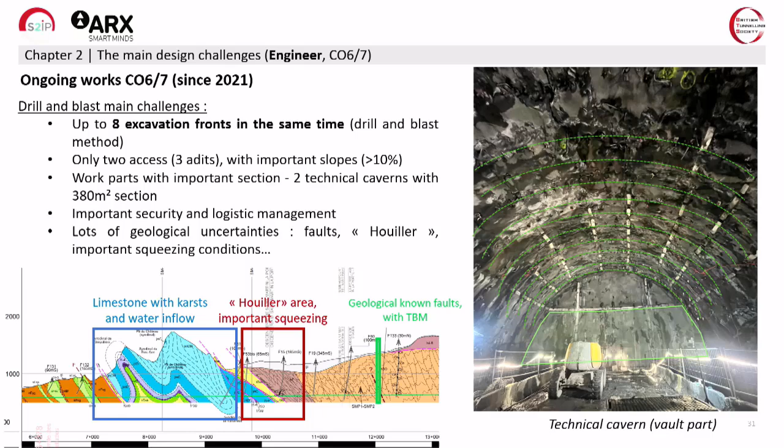No, in fact, there is a repartition that is quite a bit different. Europe takes 40% of the project for the cross-border section, for this tunnel, and France supports 25%, and Italy supports 35%. So this may be quite strange, but you also have to consider that there is a global section between Lyon and Turin, and the French part of the section is longer than in Italy.

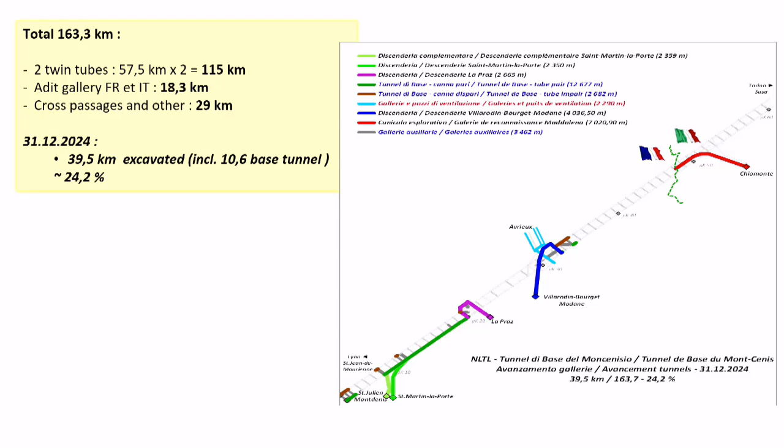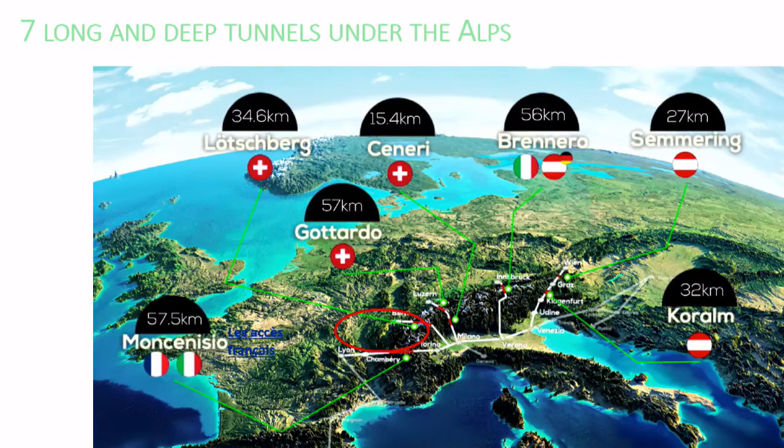On the French side, there is almost 60 kilometers of tunnels. In Italy, it's a global section of 50 kilometers without any tunnel. And the financial repartition is that the French side is totally financed by the French state, and the Italian side is totally financed by the Italian state. So the French side will cost much more than the Italian side. So to equilibrate this, the repartition for the cross-border section is to the disadvantage of Italy. That's the reason. So globally, in the global project, the repartition is almost equivalent.

Thank you for that. Okay, one online here now. This is from Dawood Thambi. It says, thank you for sharing your knowledge on the project. Really captivated by the works, including TBM assembly inside the tunnel, drill and blast activities and anchoring. There are a few questions, but I'll pick out a couple. TBM stoppages: what are the major stoppages for the TBM in terms of geotechnical or unforeseen ground conditions?

First, we are going to do some exploratory holes. That's mandatory, and we always have exploratory holes. Now, if we encounter an unexpected ground condition, we will have a look. That's the unique answer. All right.

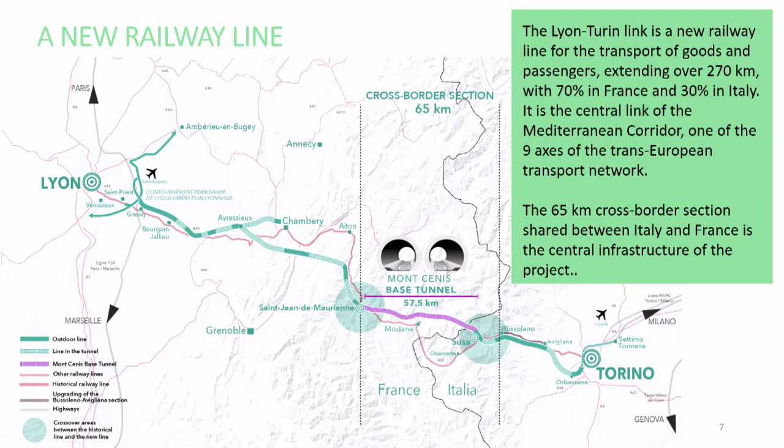Right, I'll try and rattle through a couple of slides. So first, I'd like to welcome the Norwegian Tunnelling Society here. Do you want to stand up quickly, say hello to everyone? They're on a 3-day visit, so you'll be in the bar after, yeah? All right. And we also have Helen Roth here, who's just been brought onto the International Tunnelling Association executive. Is that right? So there's Helen.

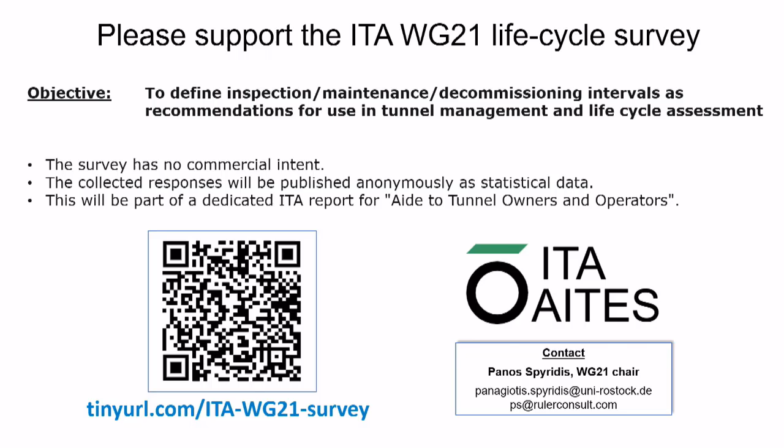The BTS have several technical subcommittees and working groups, and entry is open to anyone, particularly if you've got particular knowledge or interest in certain subjects and you'd like to get involved. You don't have to be on the committee. Topics for the working groups can be adapted, but the working groups need support. They've got a lot to do and they need more people. So if you've got a particular passion for that, please get involved. Bethan is over there, and she'd love to speak to you after.